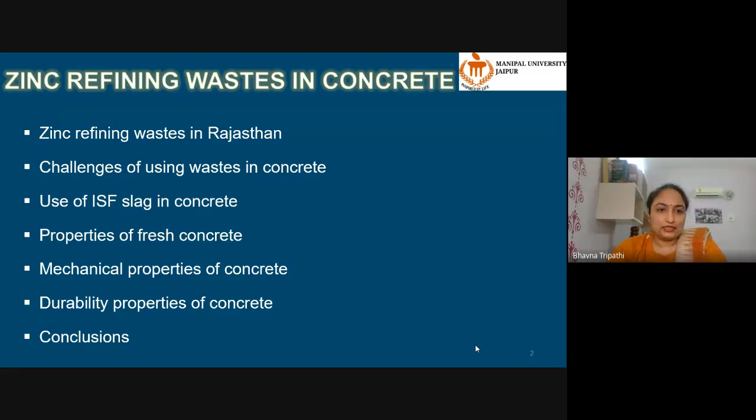Before we start talking about ISF slag and zinc refining wastes, we all understand that there are some essentials which concrete is expected to have. Whenever a designer designs concrete, there are a few parameters on which the concrete should stand and be evaluated and come up perfectly as per expectations. So there are essentials and there are some expectations also. If we talk about essentials, the first answer will be strength, because strength has always been associated with the quality that is checked first. So strength was always there.

If we talk about earlier days, like before 2000, strength was the only parameter which was taken care of. And we researchers knew that durability is paramount. Strength cannot ensure durability, neither can durability ensure that the strength will be as designed by the designer. However, we all know by now, because it has been repeatedly discussed, that strength was the only criterion for evaluating concrete in earlier days.

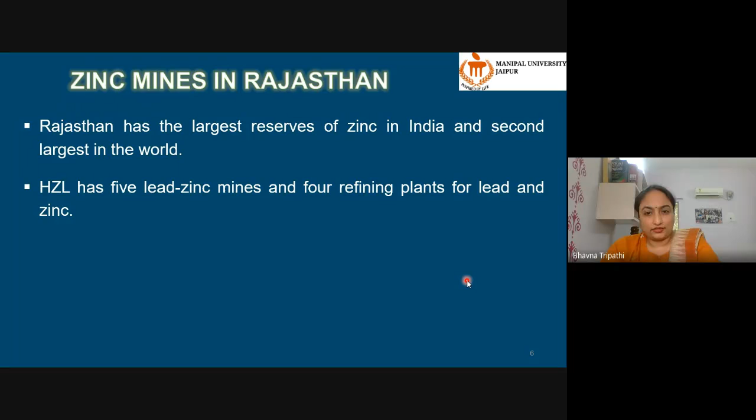HZL, Hindustan Zinc Limited, is the company which has five lead and zinc mines, and it has 4 refining plants in Rajasthan. Approximately 17.7 million tons of ore is mined only for zinc, and out of that 1.2 million tons of metal is refined by Hindustan Zinc Limited per annum. And they are expecting to expand the refining process with a new plant which is coming up recently. In one year I think it will be ready, and they will then escalate this production to 1.35 million tons.

So obviously every industry will grow, and it will also generate more quantity of waste. And for our community, the researchers community, it will again give us a challenge to address that. Let me come to the problem with this industry: these waste landfills. The waste landfills that Hindustan Zinc Limited has are spread over 75 hectares of area. So just realize how huge an amount of land has been occupied just for dumping the waste, with more than 2 million tons of waste already stockpiled.

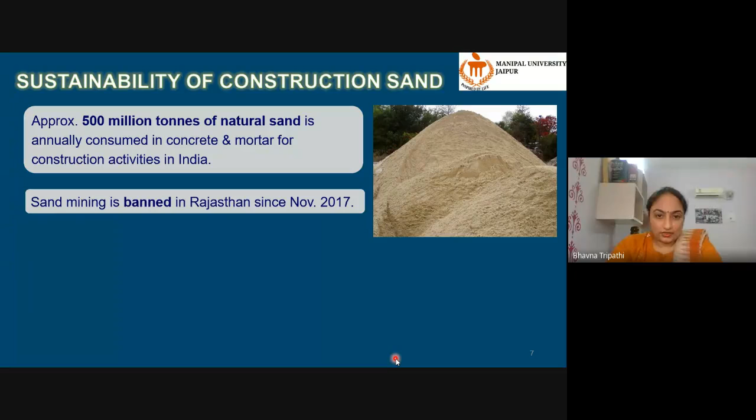The cost of natural sand before this ban was about rupees 800 per metric ton. Now it has increased to 1700 or 2000 rupees. This cost is for black marketing sand which is available through illegal manner. The problem is not limited to only availability of sand through illegal means. Number of crimes in state. Every day in newspaper, you might be seeing news related to illegal sand mining. There are murders, there is black marketing, there are physical attacks on police teams and also on the mining officials. And to top it all, this has also increased corruption.

The problem can be understood by the number of criminal cases reported in a single district of Jaipur: more than 5000 criminal cases and fines of more than 31 crores have already been reported from November 2017 to February 25, 2020. So this is an alarming situation.

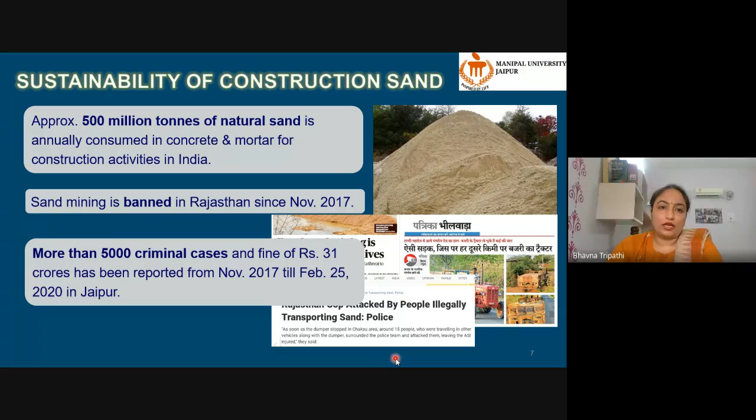We don't have any time to address sustainability. We have to come up with solutions, and there will be more and more benefits of solutions, and whatever we researchers are doing, if it can be practically implemented on field, then there is no looking back and the problem will be addressed.

So when we say that we can use mining waste in sand, I have discussed both the problems of the mining industry and problems of the construction industry. When we propose the utilization of mining waste as sand in concrete, the problem of both industries can be solved. The broader advantages are solutions to all environmental issues that the waste is causing, the saving of land dedicated for dumping waste, and solutions to all illegal activities like sand mining and related crime.

Now, let me put forward that this problem is not only limited to Rajasthan. Illegal sand mining, the problem is spread across India. There are 12 states which have been identified as hotspots for illegal sand mining, which includes states like Rajasthan, Madhya Pradesh, Maharashtra, Karnataka, Tamil Nadu, Kerala, West Bengal, and Meghalaya.

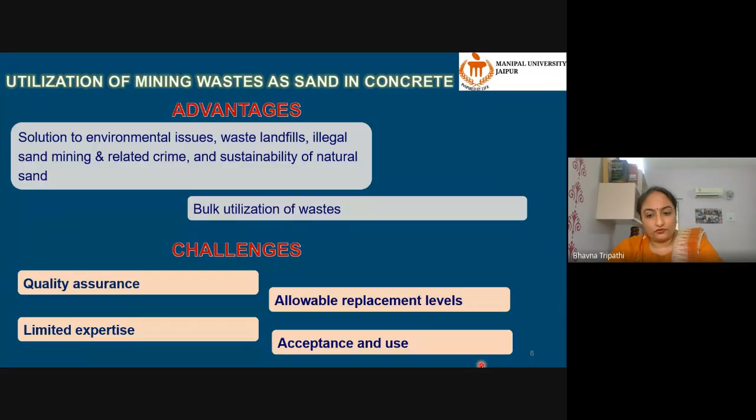So keeping all these parameters in mind - the rosy picture with all its advantages, and the challenges and practical limitations on field - I will present the study further.

These are two kinds of wastes which we have already used in concrete. The first one is ISF slag, Imperial Smelting Furnace slag. This looks very similar to sand.

ISF slag is produced during pyrometallurgical refining of zinc and lead. Approximately 80,000 tons is produced in Chanderia plant in Rajasthan. This slag contains heavy metals, and that is why it is known it is not safe for dumping for a longer period on land. It is dumped in a secured landfill. However, it is not categorized as hazardous, but it has a certain limit of heavy metals.

Another waste is jarosite. Jarosite is a very fine powder kind of waste. It is produced during hydrometallurgical refining of zinc and lead. Approximately 49,000 tons is produced annually in Debari zinc smelter. This waste contains heavy metals, and it has also been identified as hazardous waste.

During this talk, I will only present ISF slag, because discussion about jarosite will take place maybe sometime later. I have worked on ISF slag, and my colleague Dr. Priyansha Mehra has worked on the use of jarosite in concrete.

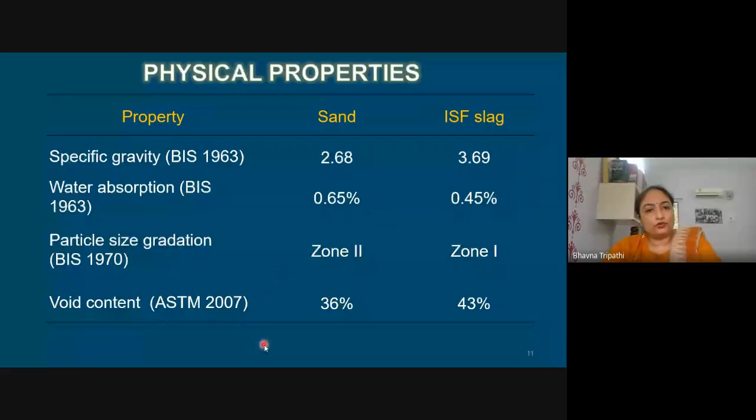These are a few of the important physical properties. The specific gravity is higher than natural sand, obviously, because it has heavy metals. Another point is the water absorption, which is very close to natural sand. So most of the properties comply with natural sand.

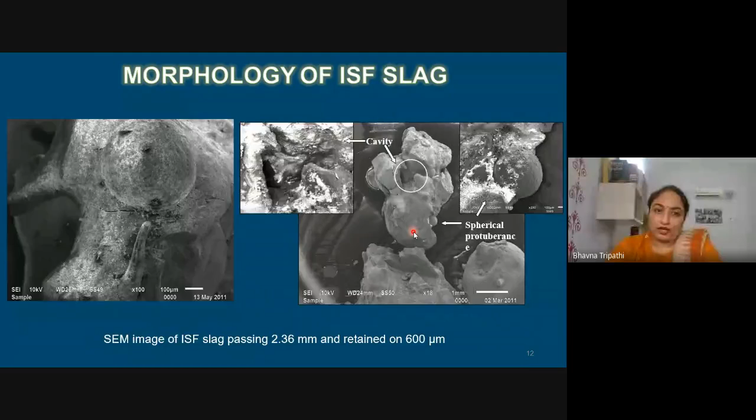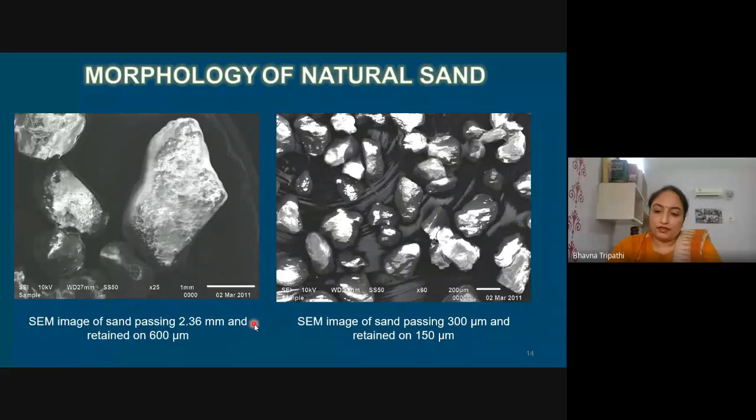However, the surface is rough. Natural sand is weathered rock, and therefore the surface is very smooth. Here, if we talk about the particles which are less than 300 micron, we can see a few spherical particles also which are beneficial for concrete. These are the pictures of natural sand, and as I said, natural sand has all weathered surfaces which are smooth, and this will be the difference between ISF slag and natural sand.

Next, coming to the mix, we had studied two kinds of mixes: one with a higher aggregate cement ratio and one with a lower aggregate cement ratio. In a higher aggregate cement ratio, we had studied further four kinds of water cement ratios, and in the lower aggregate cement ratio, three kinds of water cement ratios were studied.

Sand was replaced with ISF slag from 0 to 70% in increments of 10%. We limited it to 70% and did not go to 100%, because beyond 70% it was practically very difficult to prepare the concrete mix.

Concrete beyond 70% replacement showed a deficiency of paste, due to lack of fines. The 150 micron sieve had at least 5% finer material, but with ISF slag it is marginal, only about 1%. So when there are fewer fines and you are not compensating with another material, it becomes difficult to prepare mixes with replacement higher than 70%.

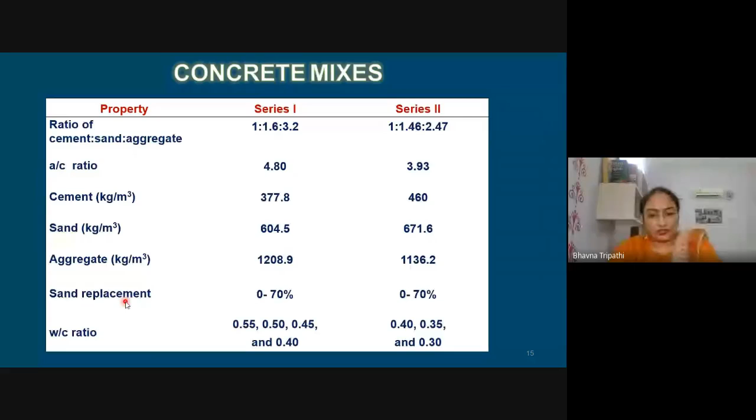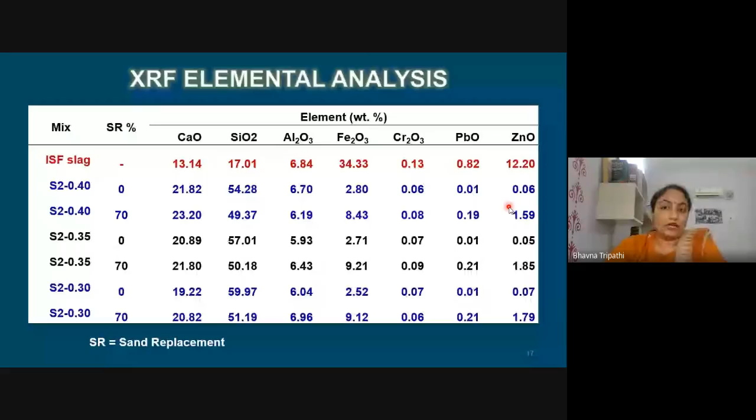ISF slag, as you can see, has a percentage of lead and zinc. However, when we look at the concrete mixes' XRF, we don't find an appreciable amount of lead and zinc, which was expected and also promising. The other water-cement ratio mixes also showed a similar kind of XRF oxide analysis. The percentage of lead and zinc was very marginal, which is also attributed to the presence of trace lead and zinc in cement itself.

Now I'll start discussing all the properties of concrete one by one. I'm not showing workability results because we largely controlled workability. The reason is that we had to keep one parameter changing so we could compare all the mixes, so workability was controlled and maintained uniform by adding superplasticizer.

The reason was that with addition of ISF slag, workability was observed to decrease. So to maintain workability of each mix, we added a sufficient quantity of plasticizer, a PC-based third generation plasticizer, to the mixes.

The density of the mix slightly increased because the specific gravity of ISF slag was high. One more very interesting observation of fresh concrete I would like to share is that there was no kind of delay in setting and hardening of concrete, even when we added 70% ISF slag.

I didn't mention the background of previous studies on ISF slag. There are many studies reporting that any kind of zinc or lead waste, when added to concrete within a cement matrix, delays setting. So this was our biggest concern when we started this work: that if ISF slag addition delays setting and hardening and affects hydration, then we cannot recommend the use of ISF slag.

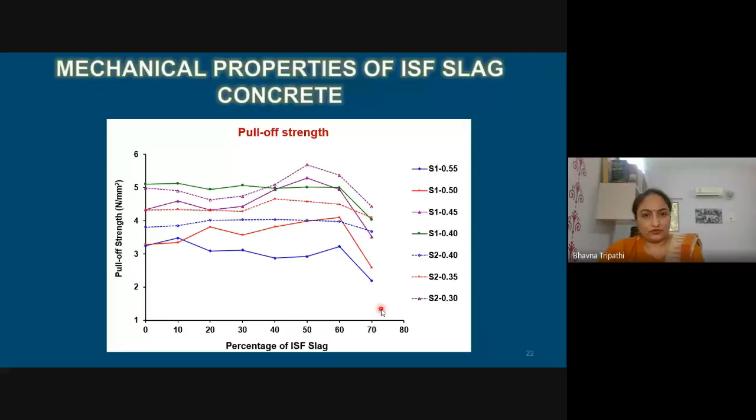Again, the pull-off strength, which denotes the strength of the cover zone concrete, also showed that the 70% ISF slag samples are having a significant decrease in comparison to control. So largely we can say that compressive strength is okay, but the flexural and pull-off strength do not recommend use of ISF slag more than 60%. And if we are able to compensate and design a mix with proper paste content, then this deficiency can also be overcome.

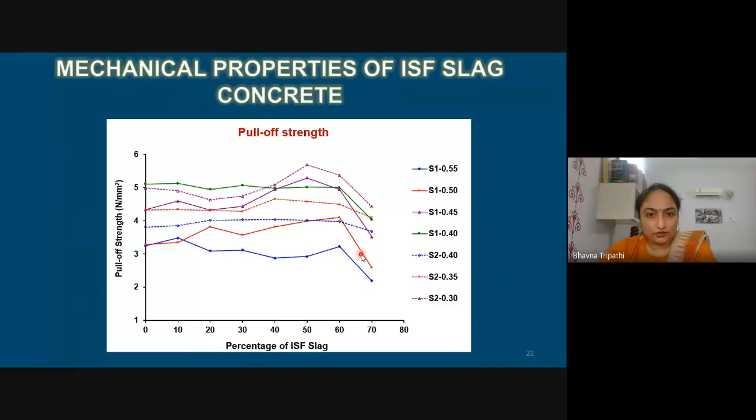And if a concrete specimen is having wear less than 3.5 mm, then it can be used for general purpose tiles, or in factories also it can be used. In that sense, all of the concrete specimens can be used for general purpose tiles, and particularly up to 50% replacement. This is 50, and all the concrete mixes which have ISF slag up to 50%, we can use the concrete for preparing heavy duty floors also.

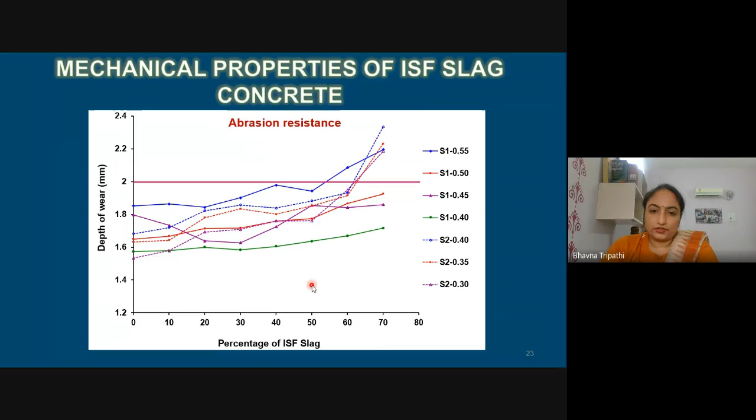Now, a very important property, other than these mechanical properties or durability of concrete: we have to check what is the effect of ISF slag, which has heavy metals. Are we using the ISF slag which is dumped on landfills to make a solution, but end up creating another problem? So leaching: what I mean to say is ISF slag contains heavy metals, and that is why it is not advisable for zinc industries to dump it in open lands.

And if we use it in concrete, and if we use it for water tanks, then would our water be contaminated? And if we demolish a building which has ISF slag, what will be the second life of that demolished concrete? What will be the effect if ISF slag is used as sand in preparing concrete pavements? Will water penetrate this concrete and contaminate the underground water table, with further damaging effects? So this was checked by evaluating and measuring the leaching potential of heavy metals.

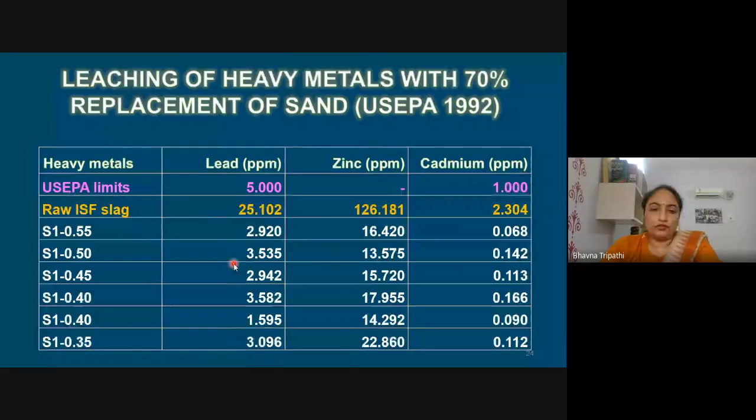Long-term testing of all the concrete specimens was conducted for evaluating various parameters related to durability. The first parameter is permeability. We all know that permeability is associated with the transport of aggressive agents. Most projects other than buildings are exposed to harsh environments and sudden changes in moisture and temperature, which affect concrete largely. Buildings are very much protected because the exterior wall is plastered, so the structural member doesn't come in direct contact with the environment.

Now, when we say permeability, we have to check both air and water permeability, and there are many methods. For permeability, all tests are indicative. Because these tests are indicative, we can largely compare the data for the control specimen with that for any variable, and draw conclusions that indicate durability. It will not ensure it. So it is very important to closely observe all the test results.

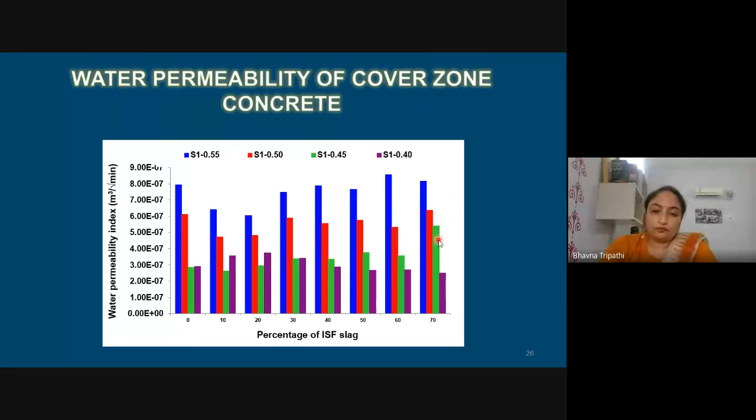Another test which we had conducted to establish permeability was DIN permeability. This is a destructive test. Earlier, both the tests on air and water permeability were non-destructive tests, which are widely used at site, not in India, but abroad. It is a sophisticated method. This one is more widely used, DIN 1048, and most of the laboratories also have DIN 1048.

So when we test DIN 1048, all the specimens we can see are more or less comparable to control. There is no appreciable increase in permeability. And if there is some plus and minus, that is a deviation, then the deviation was within 15%, which is not significant. We cannot consider it as significant.

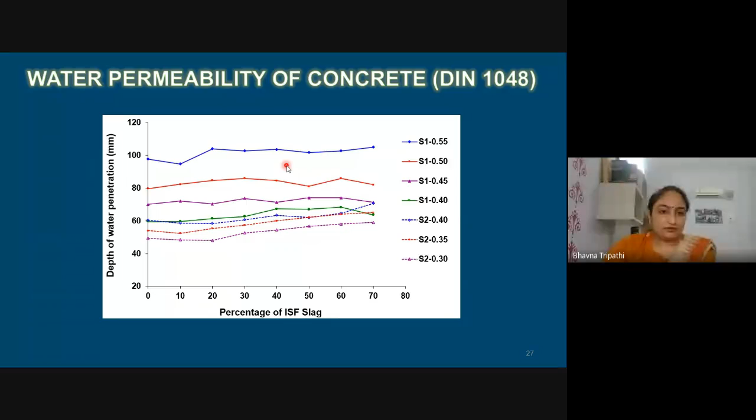So largely when we conduct a harsh test, which is a destructive test, in this test we break the specimen and we visualize the depth of water penetration. So this test indicates that there is no difference between concrete which has 70% replacement of slag and the control specimen.

Now the reason why few samples of air permeability and water permeability were higher than control, and it was not found in another permeability test which was destructive and more reliable, could be the surface quality of cubes used for testing. Now I will again remind you what I have previously stated, that as we increase the slag percentage, it affects the paste content, and the paste of concrete gets reduced. So the surface of the concrete cubes that have higher percentage of slag was not very well finished, which had pores, and that would obviously result in higher permeability.

Again, this is very true because with the autoclam permeability apparatus, you have to also look at which kind of apparatus you are using. I would emphasize, I also tell this to all my students, that don't go by the steps of the test. You should understand why you are conducting this step.

If you are weighing a sample and then you are putting that sample in water or in oven, then you have to understand the logic behind it. Don't follow the steps without understanding, and understand why this technique has been used. Maybe you can also invent your own testing method.

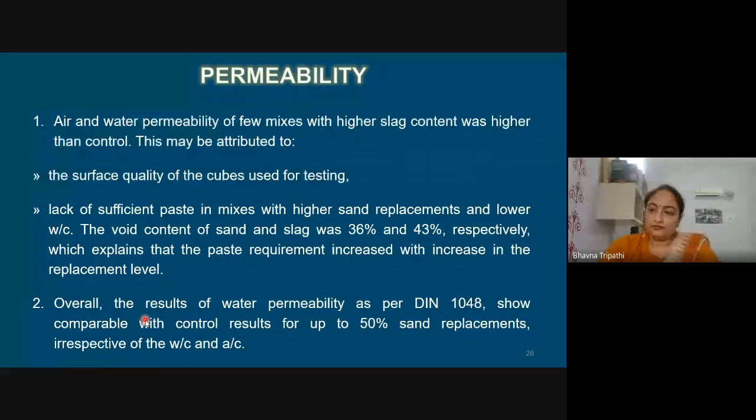Another parameter that we had evaluated is drying shrinkage. Now, let me tell you that it is not directly related to durability, because under durability, we are more focused on the harsh exposure of weather and all those mechanisms that deteriorate concrete. Shrinkage does not deteriorate concrete. However, it helps deterioration progress very fast.

Shrinkage is one more property which is going to happen. Every element which has water, when the water evaporates, it will shrink, and when it gets water, it will expand also. So concrete also comes under the same purview: it expands a bit when it gets water, and it shrinks when the water evaporates, when the pore water is not there.

Drying shrinkage was tested for a 1 year period under controlled temperature and humidity. It is very important to maintain humidity and temperature control. Otherwise, in summers, you will experience a drastic shrinkage, and when there is a monsoon, you will again see that your specimens have expanded. So, the shrinkage results, I will discuss in a tabular form.

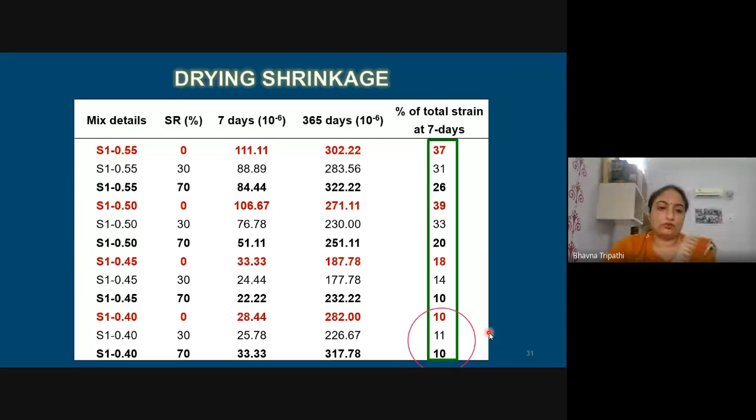Likewise, all the mixes showed a similar result, except for the lowest water cement ratio mix, where it was largely the same for the control and other mixes. The reason may be that because of the lower water cement ratio, the quality of concrete is better, the porosity is less, and the mix is dense, and shrinkage is directly affected by the pore water. When you don't have more pore water inside, the shrinkage will also be less.

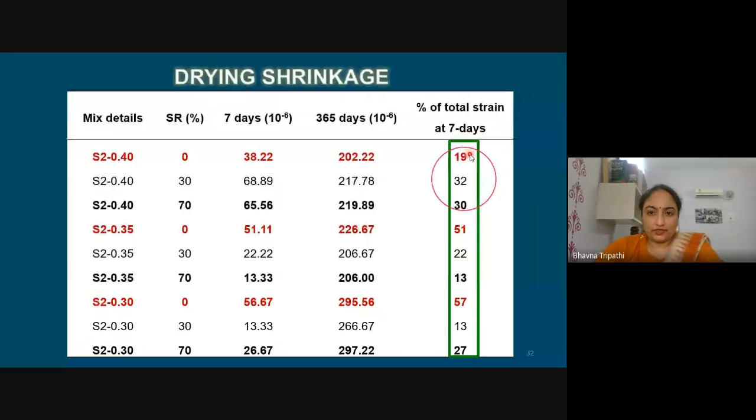Other mixes with lower water cement ratio and a lower aggregate cement ratio also showed a similar trend, except for one mix, that is the 0.4 water cement ratio mix. Here the control specimen had developed lesser strain at 7 days in comparison to all other ISF slag mixes. However, all the other mixes of this series, which had a lower aggregate cement ratio, showed that the control mix has appreciably higher shrinkage strain at 7 days in comparison to all ISF slag concrete mixes.

So overall, what we conclude from this is that as far as shrinkage strain, the dimensional stability of concrete, is concerned, we can get a very promising, very beneficial effect of adding ISF slag. Why am I saying this? It is clearly evident that addition of ISF slag in larger quantities reduces shrinkage strain initially, and whatever shrinkage there is, is very gradual. It is not sudden, it is not rapid, which is very beneficial when we talk about cracking.

Now, another parameter which was tested is carbonation. The depth of carbonation was tested at 1 week, 2 weeks, gradually up to 12 weeks. These are the results for 6 weeks, and I will not go into much detail, but what we can observe is that the carbonation depth of all the specimens having ISF slag is less than control, except for one mix, which is the highest water cement ratio mix.

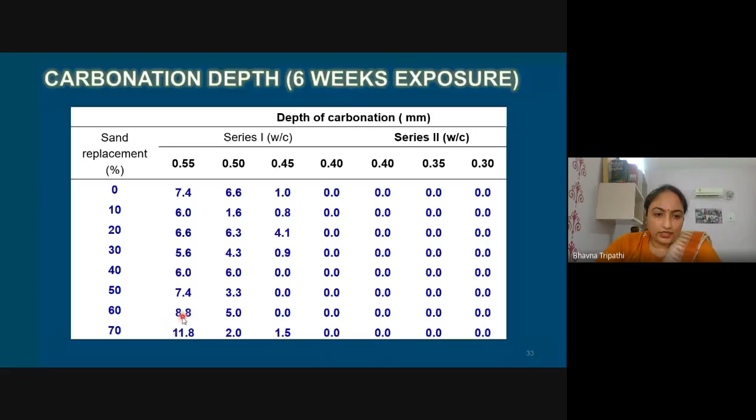However, later on, the depth of carbonation in control mixes was higher, and in all the specimens which had ISF slag, the depth was witnessed to be less than or very, very similar to the control specimen. This again was very encouraging.

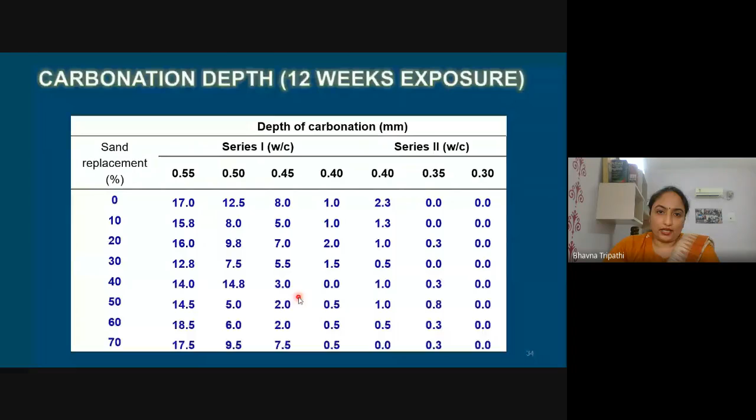And if we have a look at the lower water cement ratio mixes, you can see clearly that the depth has reduced. What I want to emphasize is that the results of ISF slag with relation to carbonation, shrinkage, and the durability evaluation are promising. So, to summarize, shrinkage and carbonation, I have already mentioned that both the properties supported use of ISF slag up to 70%.

Next property that we had studied is corrosion of steel reinforcement. Corrosion is the culprit for deterioration of most of the RCC structures. It is known that corrosion is the biggest threat to buildings, and some of the countries have now started using stainless steel reinforcement also, which is of appreciably much higher cost than our mild steel reinforcement that we are using.

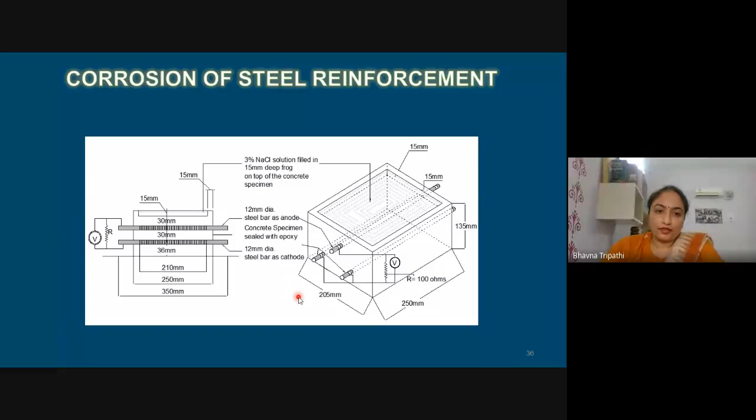So this is the specimen detail which we had used, and we had measured three kinds of observations to monitor corrosion. One was macro cell current, the other was half cell potential, and the third was the corrosion rate. Now let me tell you the macro cell current and half cell potential. Both are performed on specimens by connecting anode and cathode. We get the macro cell current, and as per ASTM G109, this was conducted.

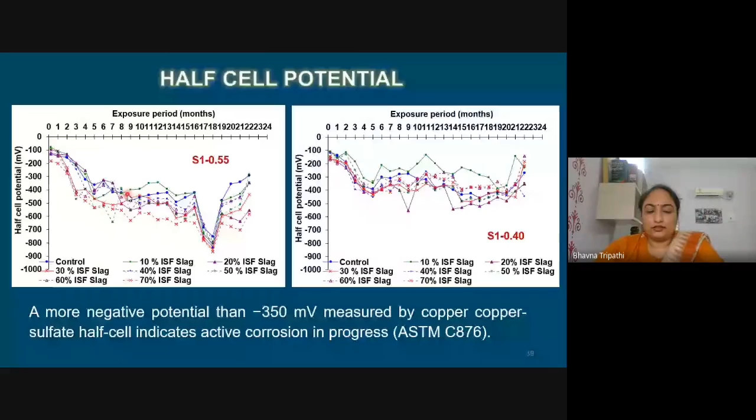These are other mixes. Finally, the corrosion rate was computed. And how do we compute the corrosion rate? Because earlier both the observations were based on measurement of current or potential. This was the final test when we broke the samples and visually observed the condition of reinforcement. We found that there is corrosion, and the corrosion rate was computed. It was seen that most of the samples with higher water cement ratio had developed corrosion. However, in the samples having lower water cement ratio, there was nil or very less corrosion.

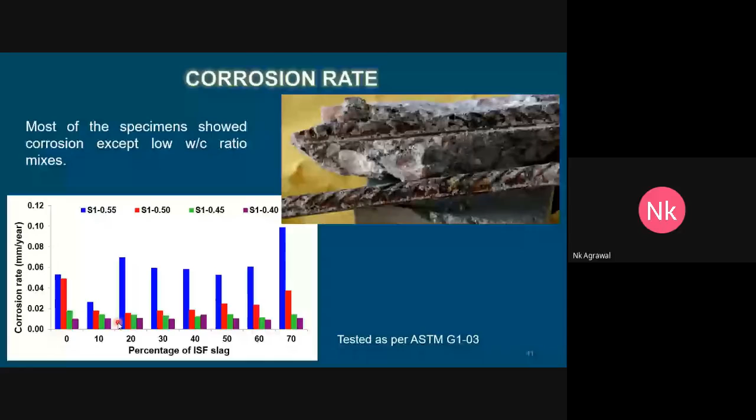So largely, if we compare the results, corrosion was not a problem at all. You can see that corrosion of slag samples having 70% slag was also very, very less than control, except for one which has been always deteriorating since all the tests, in all the tests this was having the same kind of results.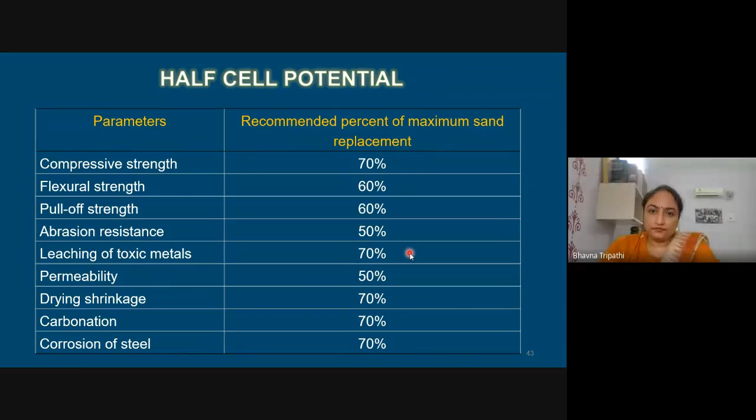Now I will sum up the results finally, which I have already discussed during each of the parameters also. This is the conclusion in a tabular form, and there are publications if you want to see.

Now a very, very interesting study which I am currently doing, I will only show it. This is artificial sand prepared from marble powder, waste marble powder. This is 100% waste marble powder, and we have granulated it, made it spherical in shape. And these are the properties of this sand.

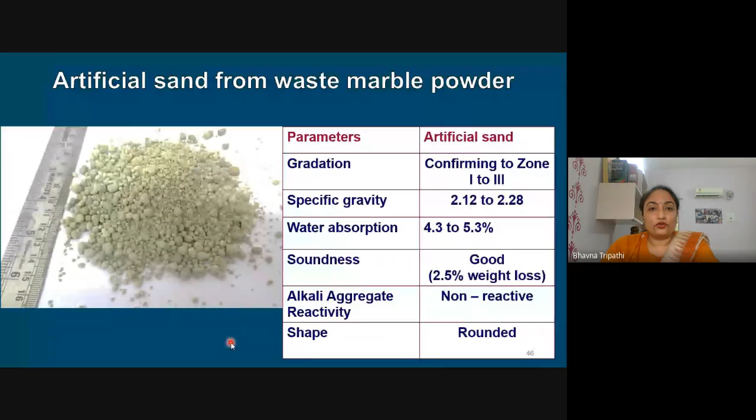So if this gets successful, then I hope that we will get a solution to all mining problems in Rajasthan, because marble is also a very big problem for Rajasthan to tackle. And this is all from my side for today. I'm open for discussions, and this technique particularly is under patenting, so I'm not presenting more details. Thank you for your very patient listening, and I'm open for questions or discussion.

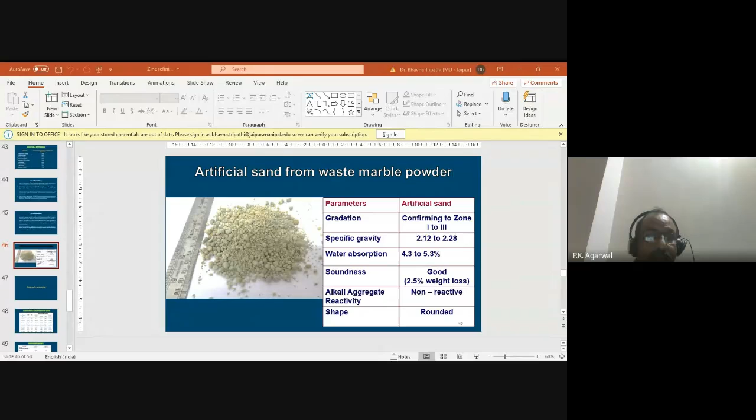Mainly the extensive research work, how it is done, is explained in this beautiful presentation. So many parameters investigated, and we are glad to know, madam, that your group is also working on waste marble powder and has applied for a patent. This will be a great boon to the state of Rajasthan if the solution occurs.

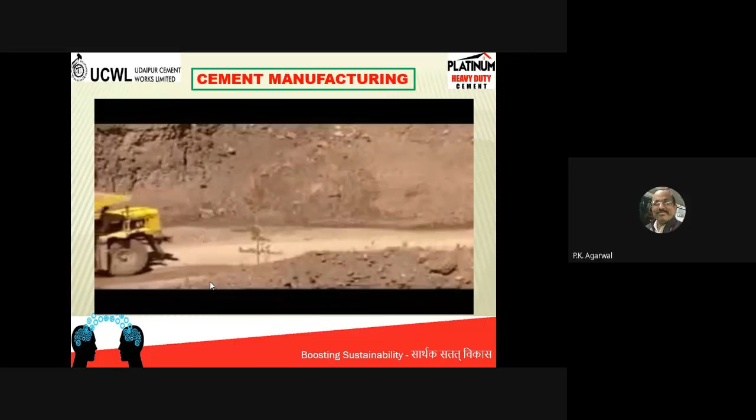Is it audible? Yes sir. The voice is not coming with the video. It is not okay, the video's voice is not coming. Any other participant, please tell if the voice of the video is coming? Kindly let me know, here it is coming. No sir, it is not coming. It's not audible. Video is visible but audio is not audible. Okay.

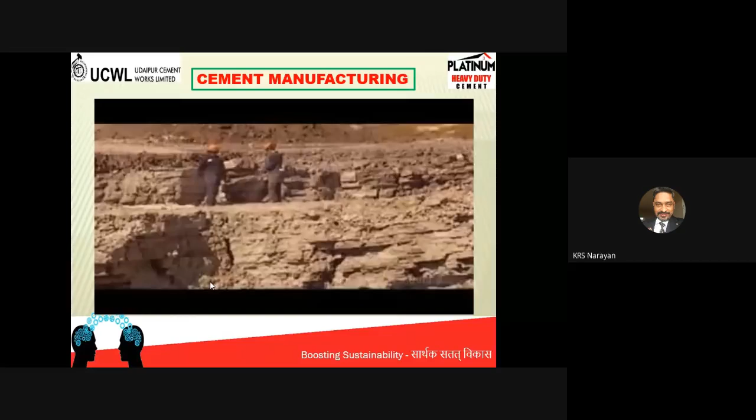So I cannot do anything, but at least participants can see the video, right? So what I will do is, during the moving of this picture, I will give a short commentary so there will not be any problem.

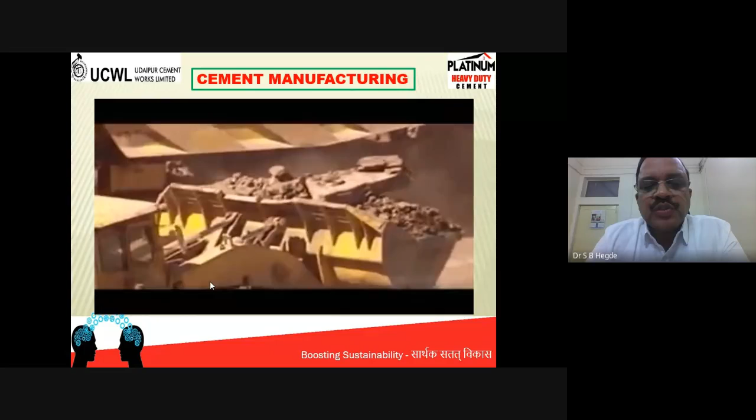As shown in this picture, manufacturing consists of quarrying in the limestone mine, which is being blasted, and the blasted material is taken to the limestone crusher for size reduction. This is the bench of a limestone mine, and this will be dumped into the primary crusher for crushing of the limestone.

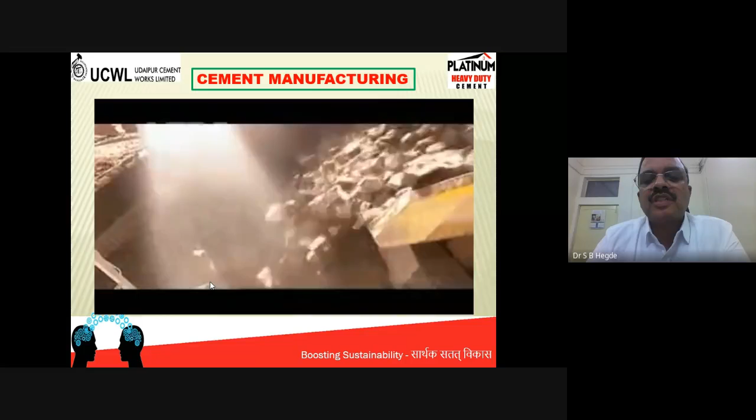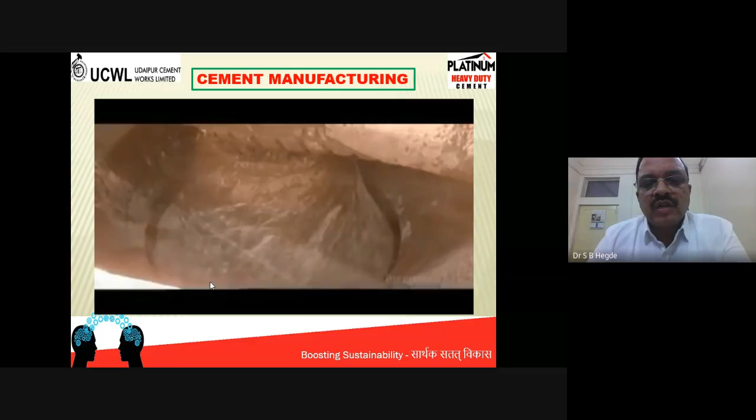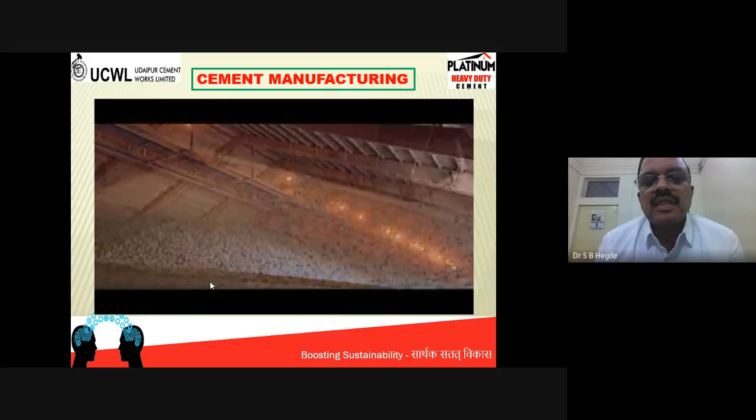While the limestone is being blasted and crushed, the limestone analysis will be analyzed online. Next you can see the belt coming from the crusher outlet, which transports material to the cement plant to make a stockpile of limestone. This material is analyzed online, and the quality assurance department gets the information in real-time, whether the composition of the limestone is as per target or not.

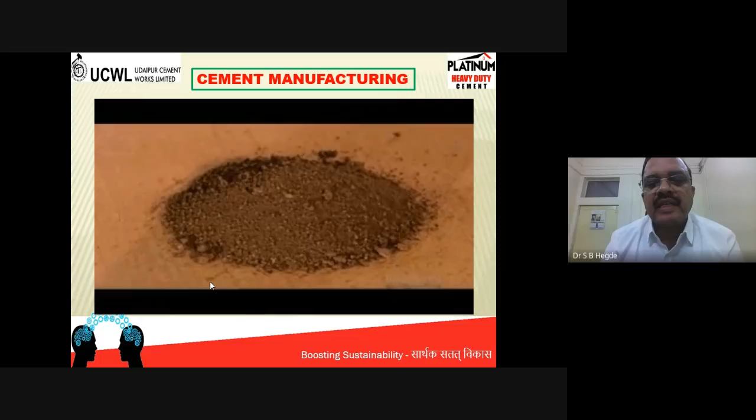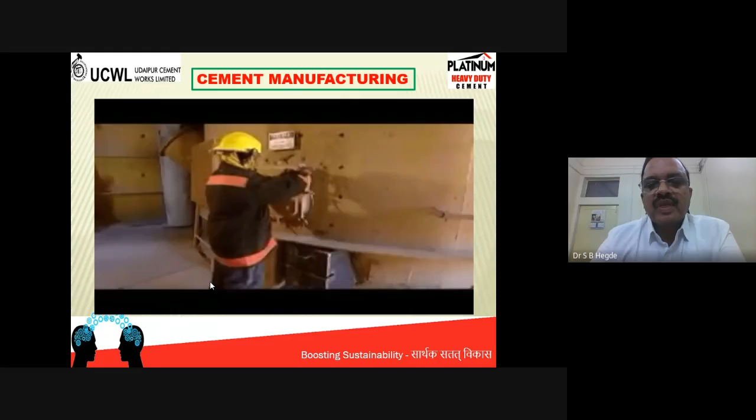This has been piled in a stockpile, and you can see the limestone transported inside the raw mill, where different ingredients of silica carriers, alumina, and iron carriers are dosed and ground in a mill called raw mill. Once crushed, this powder is stored in a silo. While doing quality assurance, this is analyzed every hour, and the material is injected into a kiln where it is fired at 1450 degrees centigrade.

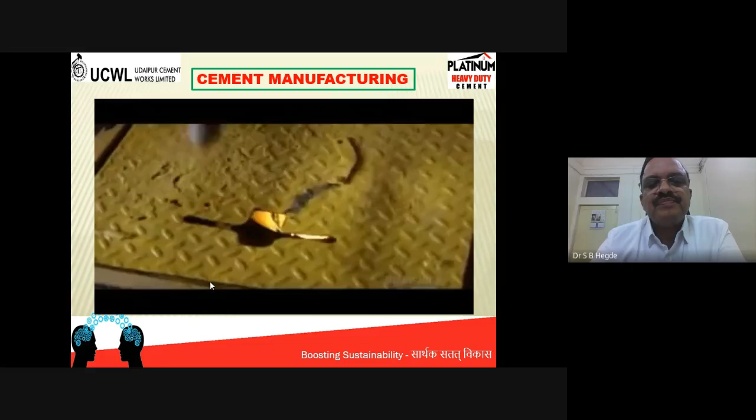You can see the rotary kiln under operation. Inside, at 1450 degrees centigrade, all these materials are converted into boulder-type material called clinker. This is the view of the burning zone inside the kiln. This hot material is sent to the cooler where it is quenched from 1450 degrees centigrade to around 100 or 80 degrees centigrade.

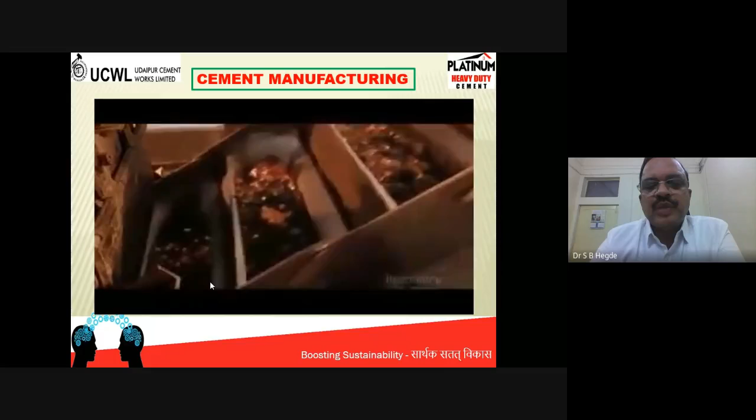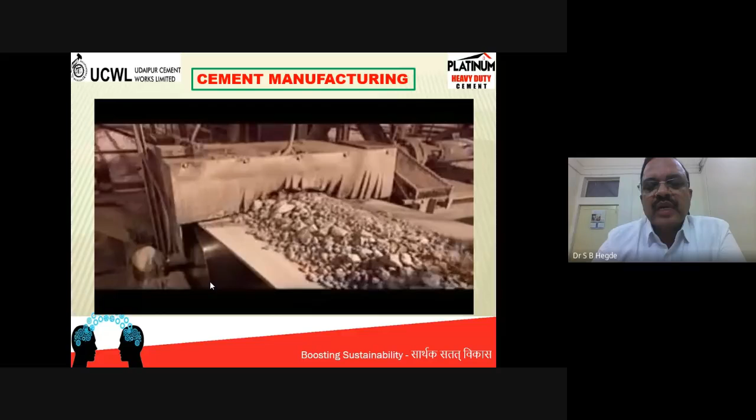That cooled material is called clinker, which is transported into a clinker silo for storage, then taken out and put into a cement mill. You can see the belt containing clinker and gypsum materials going inside the cement mill, where it is ground and cement is produced. This is some view of the cement mill. Gypsum is added to produce OPC cement.

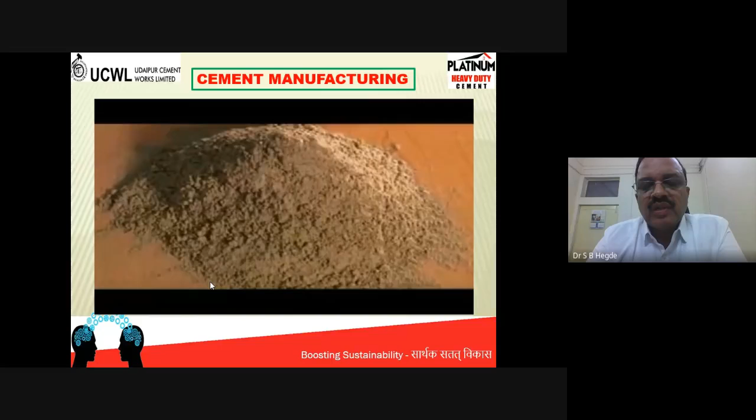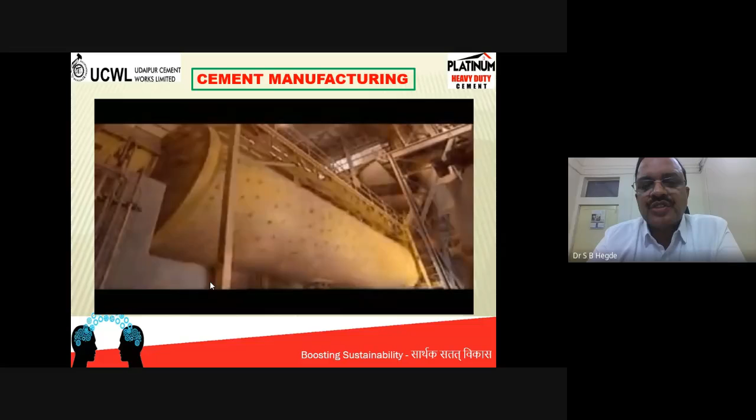Every hour, the ground material's fineness is determined as per target, whether it is coming or not. Inside the mill you can see these balls, which bombard against each other along with the clinker and gypsum material, forming a fine material called cement.

In this picture, you have now understood the broad way of manufacturing cement. For better understanding, nowadays cement technology has progressed a lot. There has been a sea change over the last 10-15 years, a revolutionary improvement in cement technology. Earlier, wet process was there and semi-dry was there; nowadays everything has become dry process.

Within the dry process itself, there has been a sea change, with a lot of technical advancement. You have seen that limestone is mined and transported to the cement plant. In the next slide, I will show the limestone composition during transport, because we have to design cement quality as per market requirements.

As civil engineers, you know what characteristics cement should have. Generally, the construction industry requirement is that you have initial 1 day strength and fast setting, so that it increases construction speed as well as high strength, because you can save some of the cement component while designing concrete mix designs.

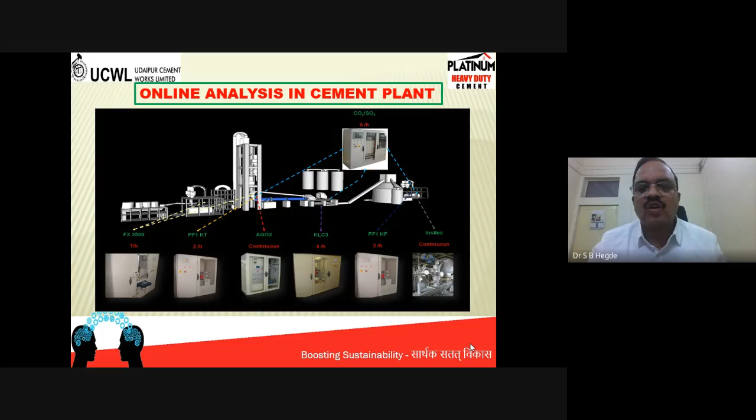And the last one is XRD, X-ray diffraction, while XRF means X-ray fluorescence. XRF is for determining the oxide composition of the finished material and semi-finished material. And XRD is the analysis which tells us the mineralogy of the material. So XRF is to determine the oxide composition, and XRD is for understanding the mineralogy of the semi-finished and finished material.

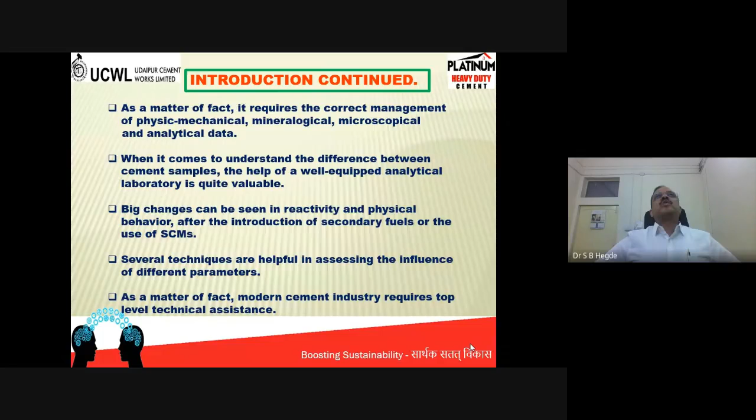So nowadays the control is very strict, because the cement industry is not like the olden days. Nowadays, a lot of things are available. We are talking about alternate raw materials. We are talking about alternate fuels. We are also talking about secondary cementitious materials of different kinds, apart from fly ash or slag or metakaolin or silica fume, etc. There are also some new secondary cementitious materials we are using.

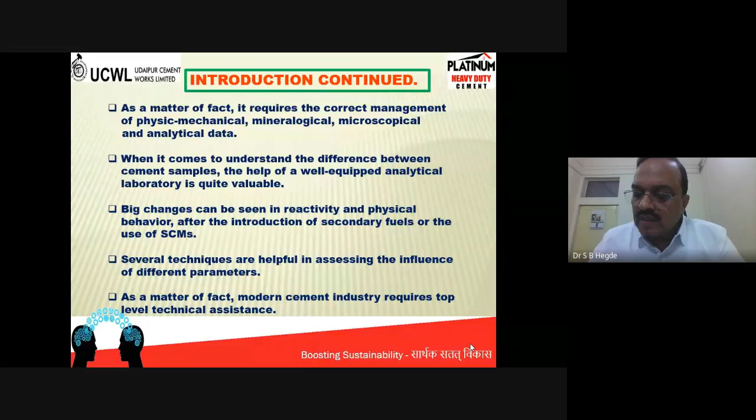So nowadays cement manufacturing is very much about checking the cost, and according to the government's environmental impositions, many stringent norms are there, and we are supposed to use alternate raw materials and alternate fuels. The pollution control board, while giving the consent to operate the plant, will take assurance from the cement manufacturers that we are going to use different wastes generated from different industries, and that too without generation of much carbon dioxide, SOx and NOx. So stringent things are in place.

So we need to analyze the samples more frequently. Therefore, these online analyzers have come to our rescue and are helping us in the plant, so that whatever we are producing is as per the stringent norms or our requirements. So in this picture you can see the online limestone analyzer which I have shown. This online limestone analyzer is fixed on the belt.

You have seen the belt which carries the limestone to the cement plant. After crushing of the limestone at the mines crusher, this equipment will be placed on the belt. Therefore, it is called a cross belt analyzer, which will give the chemical composition of whatever stream of materials is going across. So it's online.

And the second one that has come nowadays is the online coal analyzer, because coal is being used as a fuel in the cement plant. Earlier, there was no online analyzer for coal. Coal would be collected manually and then analyzed in the laboratory, which is a very stringent process. It takes around 4 to 5 hours to check the quality of coal, because coal parameters are something different.

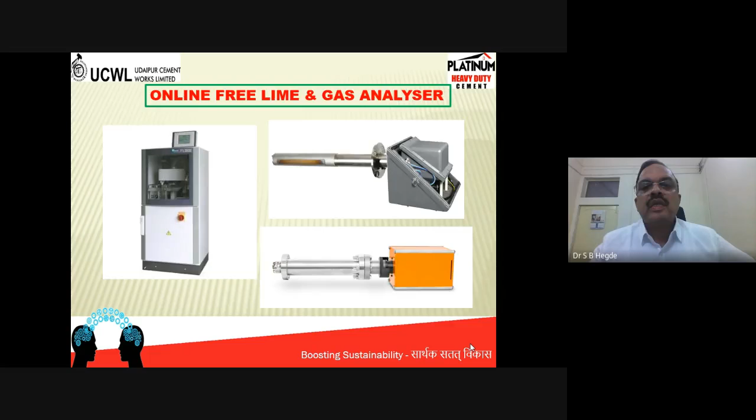And I mentioned the particle size distribution of the cement because, as you are all civil engineers, you know the importance of particle size distribution for strength development and other rheological properties of the concrete. So in the cement plant,

as I mentioned earlier, we are targeting 3 to 32 micron particle size. Higher is better. If it is coming 70%, it is excellent. If it is coming to 72%, it is still more excellent. If it is coming less than 50%, which is a danger mark, we have to improve upon it. So there are controls available. We have to change the grinding circuit parameters, that means in the cement grinding circuit, the RPM speed or separator speed. Depending on that, we control the online particle size distribution.

This analysis also will be on a real-time basis. There will be offline and there will be online also. Many of the latest technology cement plants are establishing this particle size analyzer online. Whatever cement is being produced in the cement mill and going into the silo for storage will be analyzed and gives us the particle size distribution.

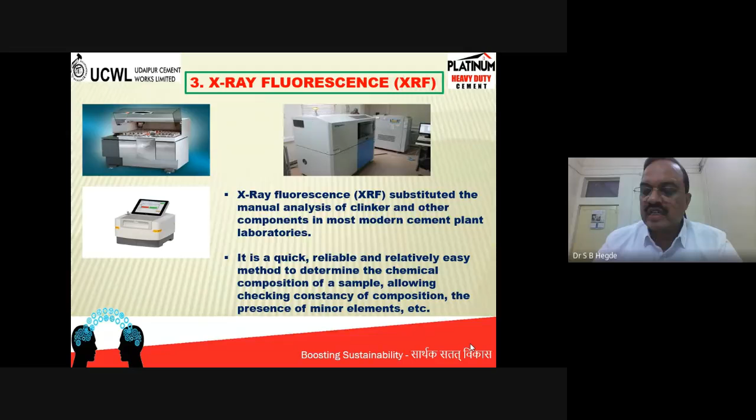For example, you know C3S, C2S, C3A, C4AF. If you take the clinker sample and analyze it through this X-ray diffractometer, you will know its mineralogy, because as you are aware, there are different polymorphic modifications of C2S, or dicalcium silicate: alpha, gamma, beta forms. By this analysis you will know which form they are in, beta, gamma or alpha, and how much is there.

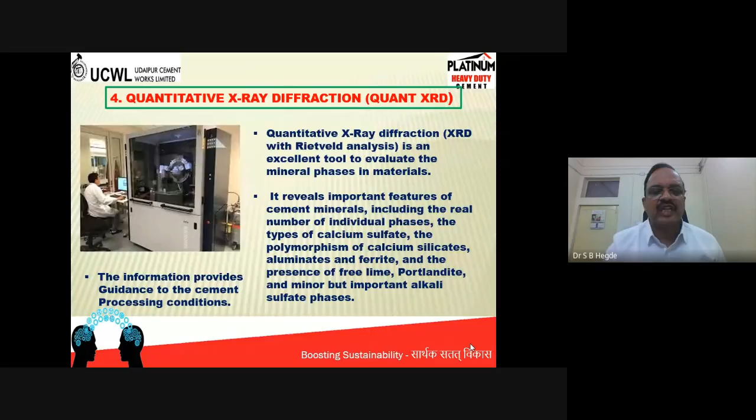So this will give the entire spectrum of the material's mineralogy. Once you identify the mineral names, you can understand when it is formed, how much, and what temperature is required for the formation of these mineral assemblages, etc. All this you can interpret, and you can do a very good study out of it.

And next I have shown you thermogravimetric analysis, also called TGA. TGA and DTA combined together are also used to identify the mineralogy and to identify how different minerals are transformed at different temperatures, depending upon the loss of weight and the prehydration characteristics, etc., and you can find out.

Suppose I want to use a different type of alumina clay and find out its heating pattern and how it will behave when you put it inside the kiln. Unless you know the behavior of these materials at different temperatures, how they will perform, it will be very difficult while producing clinker in the rotary kiln, because all these plants are very high capacity plants, 10,000 tons per day clinker production.

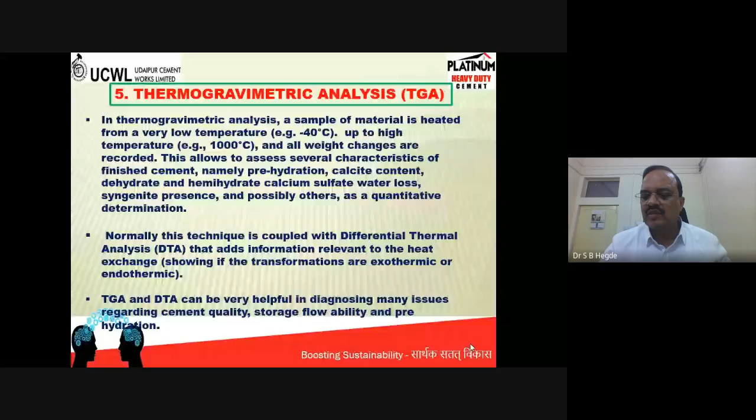But these types of equipment, TGA and DTA analysis, are generally not used on a regular basis by the quality assurance department in the cement plant, but they are required for research and development, and when you are looking for different types of raw materials in order to check our cost, etc.

When we are grinding the cement along with the gypsum in the cement mill, if the cement mill temperature exceeds 120 degrees centigrade, this gypsum CaSO4·2H2O will be reduced to CaSO4·½H2O, and it will create a lot of problems in the concrete, whether false set or flash set, generally false set, and slump loss and flowability issues.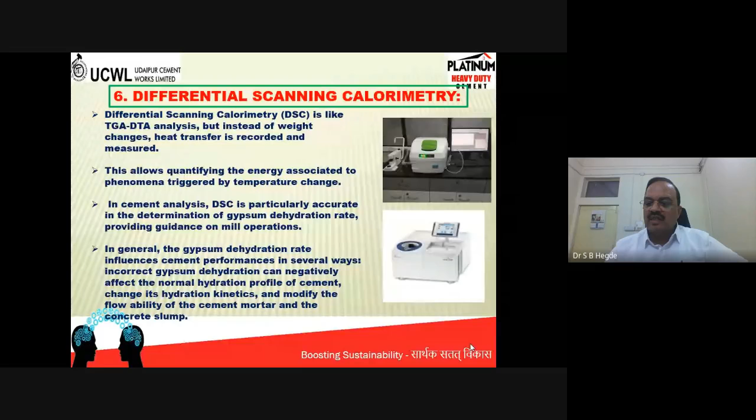So this is a new thinking, and we are continuously on the job, because inside the plant also we are practicing the supplier and customer relationship. If some department is a customer to some other department, and some other department is a supplier to another department, this type of customer supplier relationship we are professing in the cement plant, and trying to cultivate the thinking in that manner, so that there should be a good understanding about others' problems also.

So these are certain things, isothermal and adiabatic calorimetry. These things are not being used in the cement plant on a regular basis, but yes, we are using this type of equipment for R&D purposes. When I was with Ultratech, we developed a very good R&D center, investing around 20-25 crores of rupees, and I have got the privilege of putting so many new systems in the cement plant. For example, online analyzers, and in the next slide I will show the robo laboratory, etc., how it works.

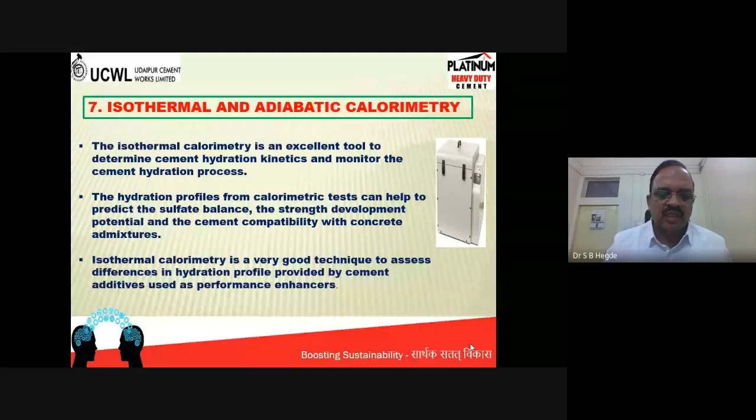So when I was with Ultratech and Lafarge in Asia, we established a very good laboratory with all hi-fi systems, and I made sure that it should work in the cement plant, and they should take advantage of each and every equipment to the fullest potential possible. So this was a big challenge, and during this challenge, a lot of learning also has gone inside, which has improved our confidence level, and also to show to the customers who are visiting.

Actually, we started inviting our consumers or customers to the cement plant to look at the system we have, and look at the technology that has been implemented, so that it will give a lot of insight to them, and in turn it will create a lot of confidence. So this type of thing also we have been doing, inviting our customer base to see all this new technology, how they are maintaining the quality, and what is the level of understanding of quality of those who are working in the plant. So this has given a lot of mileage to us to target the customers,

and to take the customers into our fold, because these people are the dealers or the civil engineers or learned fraternity like you. So they are all the decision makers and influencing segments. So in order to show our capability and competency in the manufacturing of cement and quality, the influencing segments will have the confidence level, and they will come forward to take our cement and put it under use. So this is a very important thing.

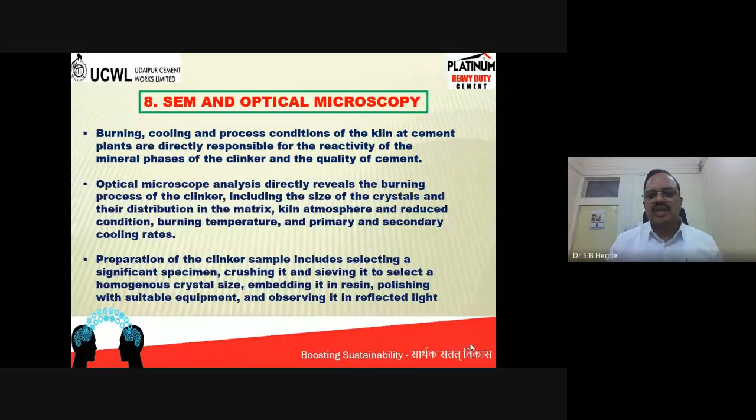So image analyzer is nothing but whatever section you are observing under microscope, you have to identify what is C3S, what is C2S, dicalcium silicate, aluminoferrite, tricalcium aluminate, etc. So you will come to know about the microstructure, how they have been arranged, and what is the percentage of this. How much is the tricalcium silicate or alite? How much is belite? How much is celite?

Like this. So earlier days we used to count each and every phase manually. So it is taking 3 hours, 2.5 hours to study one sample. So with the advent of image analyzer, within 10 minutes you will complete all your analysis, and you can come to know about the microstructure and its percentage presence within no time. So this has helped a lot.

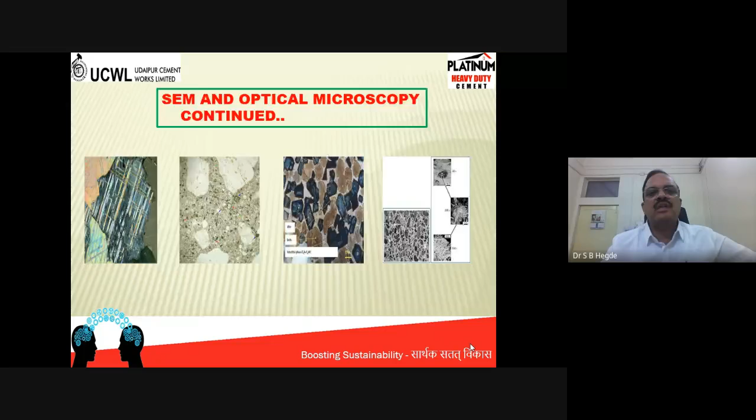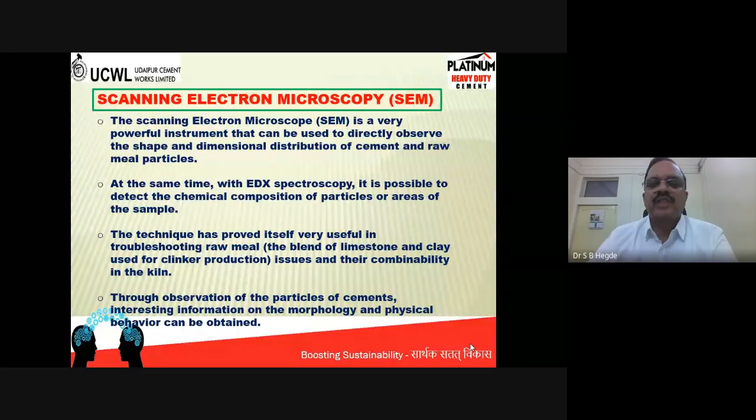So the scanning electron microscope is a very costly affair, costing very high vis-a-vis optical microscope. So this will not be required for the cement plant on a day-to-day basis, but it is very useful for R&D institutes and research institutes to study the hydration products or mineralogy or CSH, and for the concrete you can do a lot of things. You can make a good research report out of it.

I would like to show a video here about the robo laboratory, the online laboratory I mentioned. As I said earlier, there are 5-6 finished and semi-finished materials we use to collect samples from. For example, raw meal every 1 hour, kiln feed, clinker, and cement every 1 hour - the sample will be collected and analyzed manually. Collection was manual. This was the scenario around 10 to 15 years ago.

Once this online laboratory, or robo lab, came into action, many big cement companies started putting these in place. I had the privilege of establishing more than 6 to 8 robo laboratories in Ultratech, and more than 10 laboratories in Lafarge across Asia, Japan, Korea, and other places. To give you some information about this, I'm showing a video which I think will give a lot of insight.

Professor Saab, I will start the video. Kindly let me know if the sound is coming or not. Is it okay? Sound is not coming? Not coming. Okay, so you can see this, I will give you the interpretation commentary.

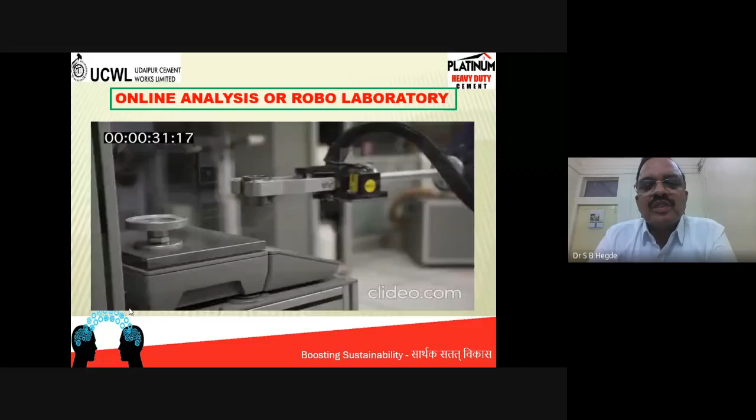This is a robo laboratory, an industrial robo which is the control room of the robo in the cement plant. Different samples of cement are coming from different locations in the plant to this laboratory control room. The robo will receive the sample, prepare it, and put it under XRF for analysis, and also put the material inside the particle size analyzer for analysis.

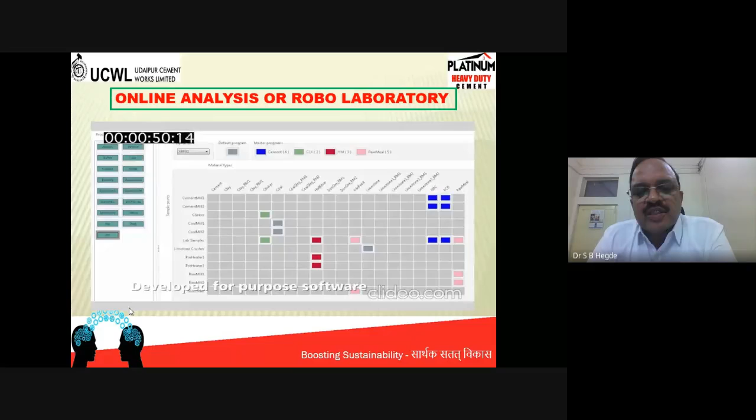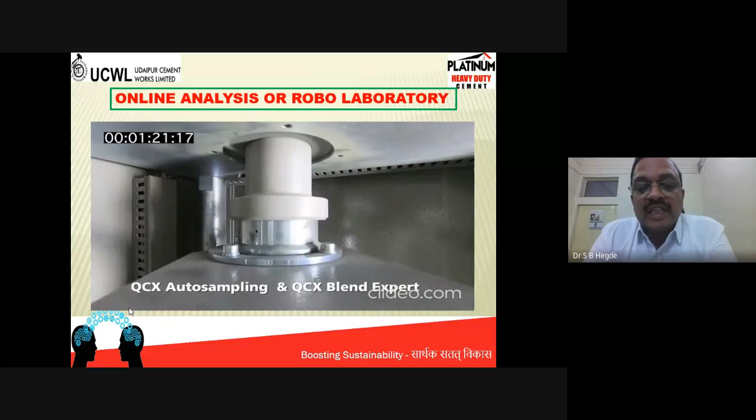So no manpower is required. It receives samples from different locations which come through capsules automatically via a pneumatic conveying system, and puts them on the laboratory XRF belt where they are analyzed automatically. You can see it preparing a sample for the particle size analyzer and putting it inside. There is no manual entry, sampling is automatic, no human involvement - everything is analyzed and stored in a laboratory information system software.

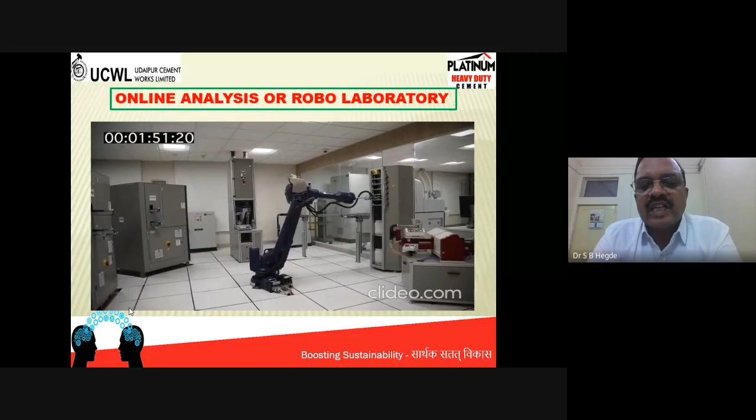This is called LIMS, and it stores data in different places. For example, analysis of raw mill will be stored in a raw mill slot, kiln feed slot, clinker slot, and so on - every hour this will be analyzed and the data stored there. You can use this data bank for your analysis.

If you want to study statistically, you can do it - different histograms or statistics of that data. You can make a study out of it, whether you want 6 months, 1 year, or 2 years of data - everything can be retrieved within no time. You can do statistical analysis and find the trend, which gives a lot of insight from the historical data to proceed further.

You can also chalk out the next strategy. I'd like to tell you that plants are even equipped to dose the system automatically, because manually this used to be done in cement plants in earlier days. Nowadays all plants are equipped automatically - the dosing system will automatically set whether we need 2% or 3%, depending upon the chemistry, by itself. There is no human intervention at all.

So in a modern cement plant, people just sit in the quality assurance control room, and similarly in the process control room, the centralized control room or CCR, just witnessing what is going on. Even the pyro-processing is taken care of by the software itself, depending upon the parameters we have set to be maintained. It automatically takes corrective action and does everything automatically.